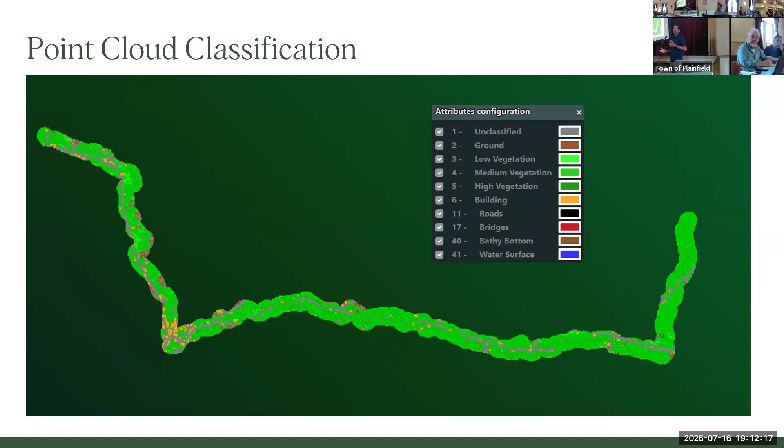Next slide. And then this is kind of the heart of it. I just wanted to zoom way out. We're going to start out and zoom in, and this is a point cloud. And if you look at the classification, the different colors, each one means something different. So this information can penetrate through different layers. So one of the neatest things, go to the next slide.

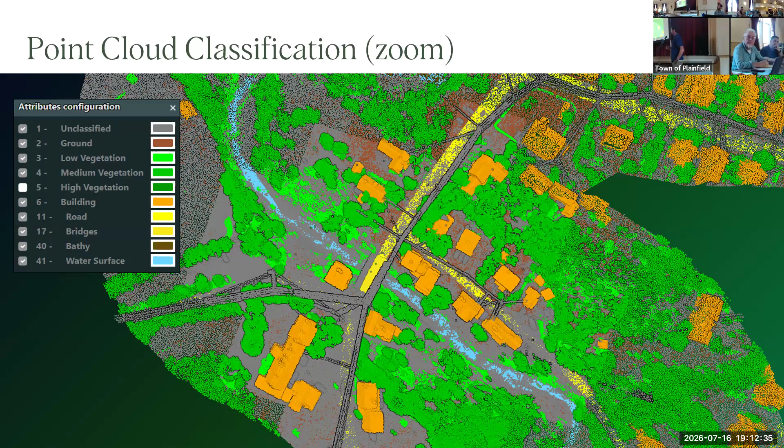So here's a zoom in of that point cloud, and you can start to really resolve every building. You can even make out some of the utility wires that are hanging, because this thing has such a high point density. And you go to the next slide. And one of my favorite features is from the top left, top right, bottom left, you can just turn off the layers and really look at any specific layer you want.

So if you wanted to do a high vegetation survey, you would now have that across the Great Brook corridor. And if you wanted to look in the right at just the topography on the land as well as the river channel, because this green LiDAR sees through water, you can do everything. You see the roads in between, the water surface is light blue, the buildings are orange. So it's a really valuable, powerful data set that's really ideal for hydraulic modeling.

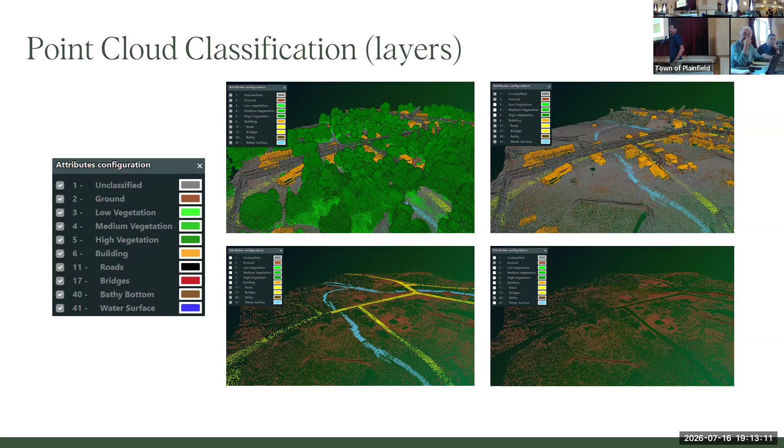Let's see, slide. And then here's a cross section. So in the model work, let's start on the bottom two. The bottom left is a 2023 state LiDAR. It's got a pretty good accuracy, about a 1 foot accuracy. And again, on the right, we're less than a foot vertical, about a 1 foot horizontal.

And this is just an example to show a little bit of increased detail on the right, but also you can really see the changes in the brook. These are the two same spots. This is one of the spots up near Brook Road where the river migrated into the roadbed, which is right here. Excuse me, Roy, is that what we call the Grand Canyon? I guess there's a couple of Grand Canyons out there, but I think this is the one that Carl and the road crew call the Grand Canyon. Okay. Yeah, so it's sitting on the road.

And then if you look in the upper right, a really astonishing view of how the brook has changed. Interestingly, the dark blue line is the 2023 LiDAR, and then the lighter, gray line is the 2026 that we just flew. The most obvious thing is you can see the whole roadbed's gone on the right side of this plot. But you can also see that the riverbed actually built up a little bit where the former river channel was, something we all see commonly out there.

The river goes up and down and moves side to side. A little bit of changes on the valley wall. That could just be a little bit of an accuracy thing. You can see the shape is translated over.

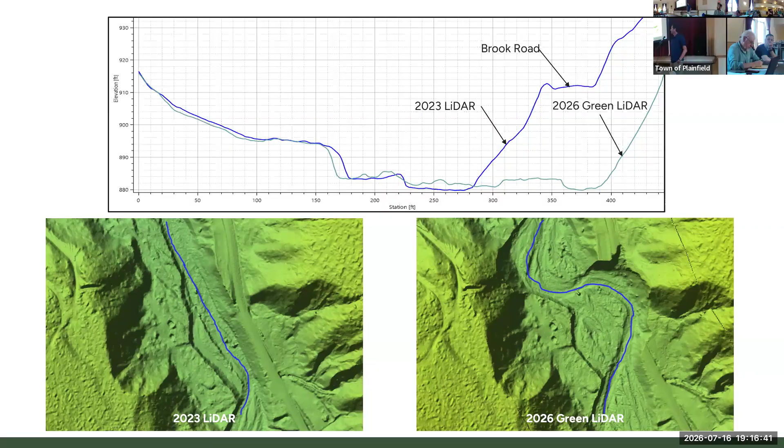Hi, everybody. So I'm going to walk through what we've been doing so far. We've been working on this for several months, trying to prepare for when we got the LiDAR. Now that we have it, we've added that into our model, and we're now using that. We were waiting to finalize the modeling and get the real detail in there until we had that accurate data, so we're actually representing what exists now. So we've been holding off for a little while, but also making progress, getting ready for that data. But now we have it.

So what have we been up to? We've been taking our model and updating what we call the geometry, the data that goes into the model to do all the calculations. We've been estimating flows and looking at how those compare to measured flows. We have some data from various folks in the community. UVM did some flow measurements at certain spots along the brook, and we compare what we calculate to what they did to see if we're matching reality. That way we know we're at a good starting point before we start changing things.

That's what we call validation for our model. The one we're going to be talking about is called the rain on grid, and I'll explain what that is in just a minute. But the idea is it's rain falling down on our model, and we calculate the flows from that.

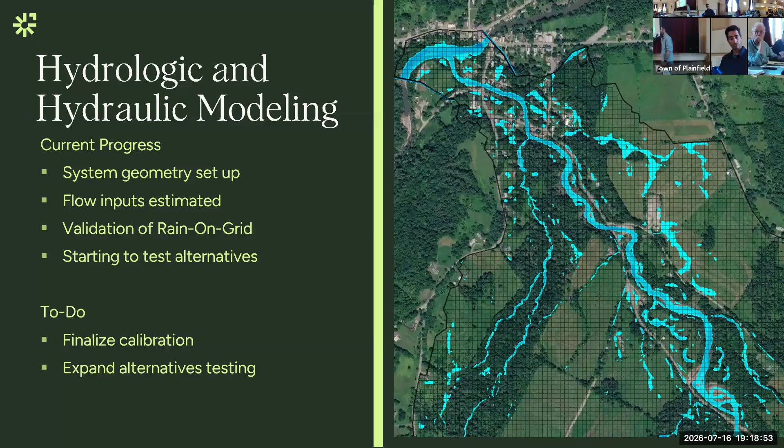All right, so you're going to hit the video. You should be able to just click and it should go.

Nice. So if you watch what's happening here, this is a terrain surface, and you're watching as the water builds up on it, and you're watching that flood move through. And the way we evaluate that in graph form is this hydrograph. It's flow of the brook over time. And what you saw was the water as the rainfall builds up; as the storm moves through, the flow builds up, and then it moves through that area.

So in the video, you're watching all the water from all around come into the brook and kind of increase until it gets to that peak and then drop back down again. So here's that peak, and then it's starting to decrease again. So this is our rain on grid model.

What it is, it's a digital mesh in our computer, just a bunch of grid squares. We tell it how much rain falls over what time period. We tell it what the ground looks like, what the soils look like, what the slopes look like. We give it that terrain, that LiDAR that we had. And then we let it figure out where the water goes and how much water it produces, pretty much.

So we're telling it, okay, this soil is really tight, it's not letting much water infiltrate, more of that's gonna flow off. And we're gonna see that in that model. And each of those little grid cells calculates separately how much water is produced from the rainfall, and then transports it down through the model, and then eventually you see it moving through the brook right there. So this is just a little video clip of what the results are from all of that data input going into the model.

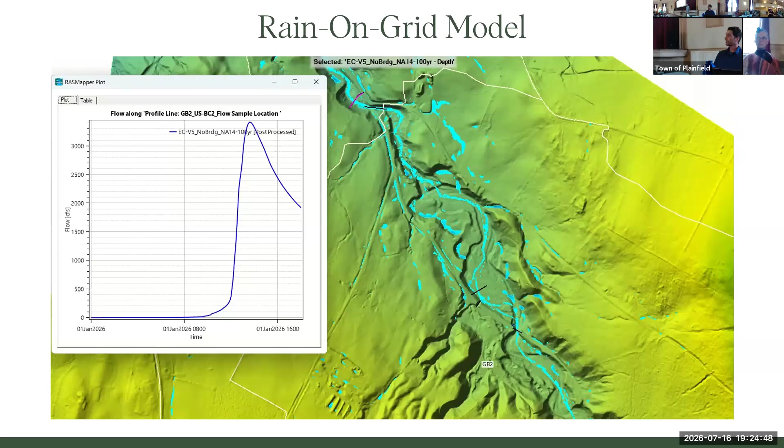And then what it produces, right, I was telling you, it takes that rainfall data, turns it into flow, and then we can go into the model and look at what that is. So this is in their hydrograph, right, flow over time, and it's showing the peak on Great Brook where it meets the Winooski River of about 3,500 CFS, which is matching up with what the flow estimates were by UVM, and I'll talk about that a little more in a sec. But we're pretty much taking rainfall data, and we're turning it into a flow curve, and we're looking at how that moves across the land with the model.

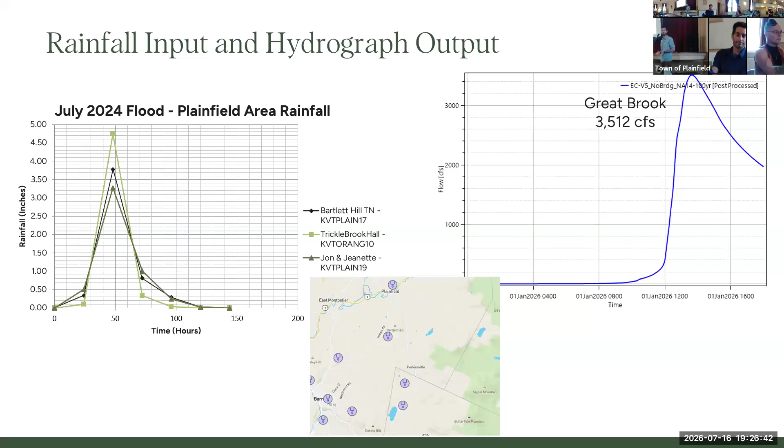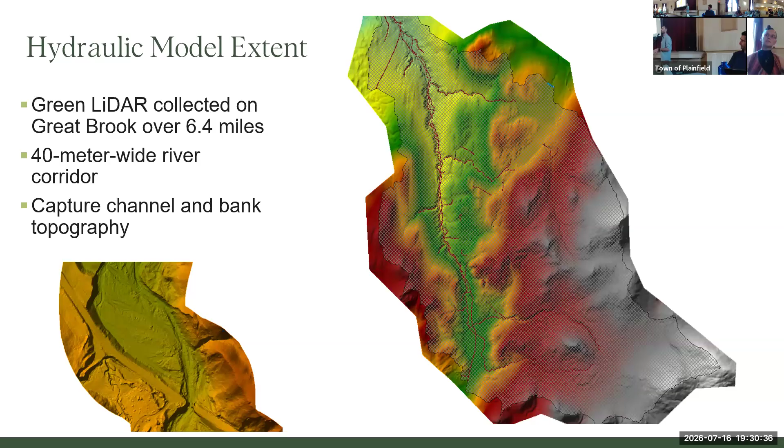Other input data we have are grid cells. So this is what I was just talking about with the grid cells. You can see there's little squares and there's other little shapes in there. Our average cell size is about 50 feet by 50 feet. That's over kind of the full watershed. And then in the more detailed areas, we get down to maybe 5 or 10 feet. So a little 5 or 10 foot square in the channel, along bridges, along structures.

We then tell the model where the channel is by putting in these lines. We tell it where berms are and ridges and embankments, and all of that is added in to tell the model what the ground looks like and show it where the cells should be. So this is quite a bit of work kind of manually going through and telling the model what it should be focusing on.

May I interrupt briefly and just say, I believe we're looking at where Cameron Road meets Brook Road. Is that correct? Yes. Whenever you can position a slide like this, I think it would be helpful for everybody in terms of saying where we are. Yeah, good point, thank you. Cameron Road's coming down and kind of meeting up with Brook Road right there at the bridge that we're calling GB-03.

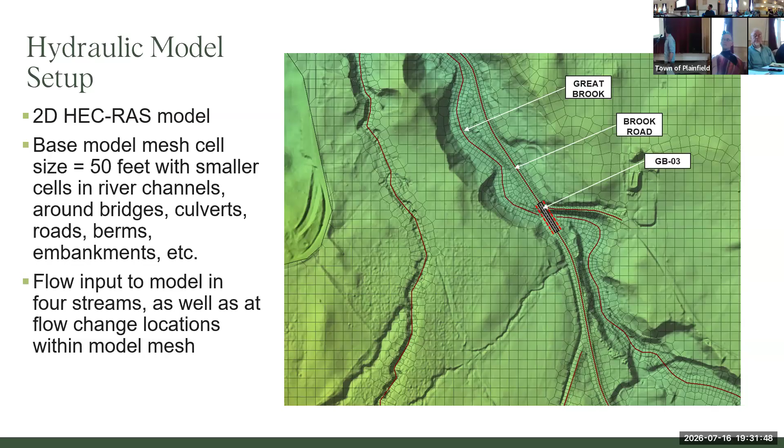Another kind of comparison, we looked at one of these earlier, of the green LiDAR versus the 2023 state LiDAR. And you can just see how different the channel is, right? You can see a lot more meandering, you can see it cutting through the road, through Brook Road. And so when we're modeling, we want to represent reality, and right now reality is this 2025 green LiDAR. So we've added that in, and now that's included in the model.

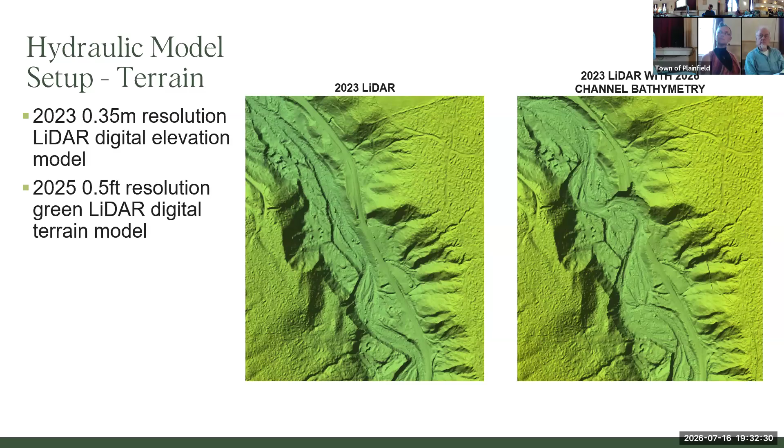Nothing at Brook Road, right? Good point. Yes, that should be just north of Brook Road, I think. Pretty close to Cameron.

I was mentioning land cover and soils. So those are our two big inputs for calculating that runoff and the flow. Here is a map of land cover. So this was done in 2022. UVM did a flight, and they had the data they collected. They're able to say whether there's tree cover, whether there's grass, whether there's farmland, whether there's houses. It's pretty high resolution. You can get individual building lines from this.

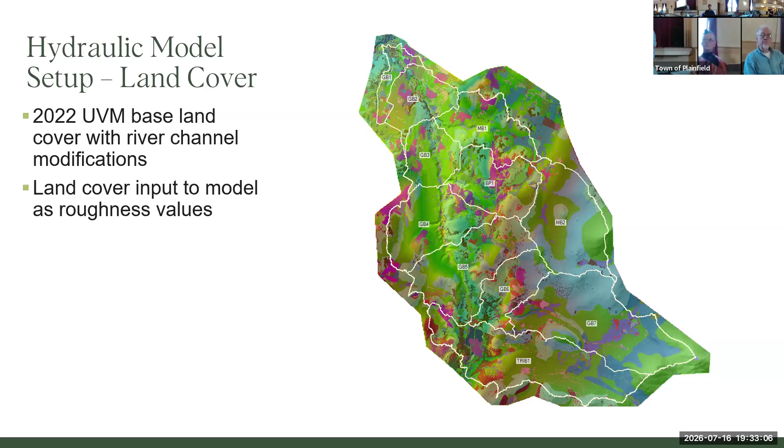So this data is all into the model, and I kind of just put it in this picture under the watershed. So you can see these little areas defining our watershed into little sub-basins. One of the last things we've added, so we got a bunch of data from Fitzgerald Environmental Associates this winter. They went out and did some survey of all the bridges.

So you can see here, this is what it looks like in the model when we enter in the bridge data. So we go in, we'll have some survey data of the bridge. We enter that into the model, and you can see this is what kind of the bridge opening looks like if you're facing, I guess, downstream from the bridge. So we enter that all in so that the model knows the shape, the opening size, the slope, all of those sort of factors, and so we can really have detail at the bridges.

All right, so kind of transitioning here, we've entered all of our data into the model, we're running the model, and now we're going to start looking at alternatives. That's kind of the next step that we're just diving into now. And how do we do that? How do we start to come up with ideas of what can we change? Where can we make modifications? Where can we do projects to help?

Some of the things we look at are, where are there constrictions? Where is the river being constrained, or is it being manipulated in a way that it doesn't like, and it's going to fight back on us. One thing we look at is the bridges. We look at the floodplain areas. We look at constrictions, so where the channel is narrowed or it's been shifted or straightened. And then we see how the model reacts in those areas.

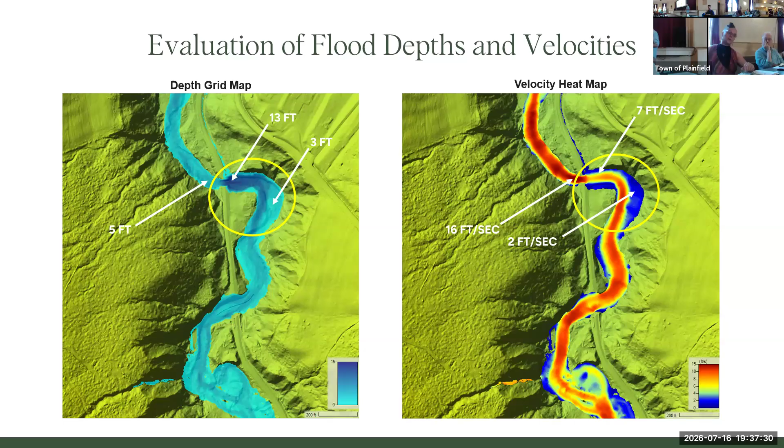So these are kind of the first steps we're taking right now. We're taking our results and saying what's happening here and what is that telling us. And I think this kind of shows that pretty well. All right, so now we're going to go through some of our initial alternatives that we're starting to evaluate. We're just in the start here, so a lot of this stuff is still just, we're playing around with the model, we're trying ideas. None of it's like projects that are about to be constructed. This is all just kind of ideas, and let's start thinking about what we can do.

One of those things is floodplain restoration, right? So that's digging up some of the floodplain, lowering it so the water can get out in areas where we want it to get out, and then it slows it down, and it also reduces the flood depths so that it's not affecting homes and businesses and properties in the road itself. Right now we have in those green squares some areas we've identified as potential, just something we want to try in the model. Even if it's not going to happen, at least we can figure out how that affects things.

So moving down through downtown, you can see there's Mill Street, there's the bridge there on the lower left, and then we have Brook Road going up to the right corner, just to get your bearings. And yeah, we have a bunch of different areas where we're saying, okay, if we lower that, does that help the rest of downtown? Moving a little farther up, we have some spots where the river meanders, and we've said, okay, can we cut that area down to slow the water down again and reduce it before it hits the areas where it gets a little tighter. So this is just a bunch of different spots where we're calling out some spot where we can test things.

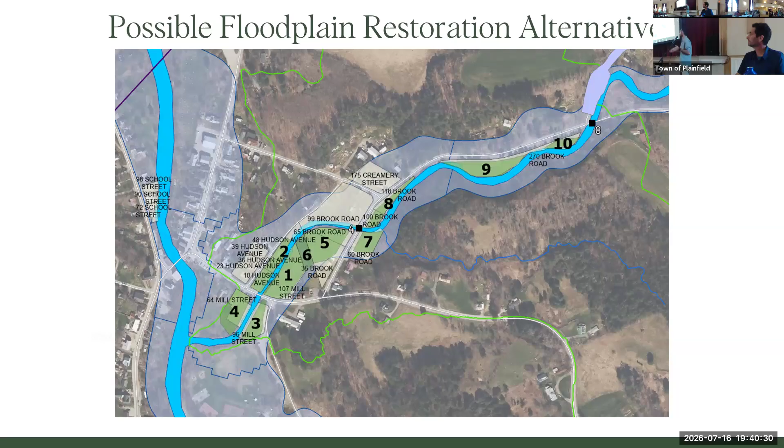All right, so we are saying alternatives, we have the floodplain restoration. Another option is the bridges. We know we had a lot of bridges wash out from this last flood. And when we went through and had all of the bridges measured, we looked at how they compare to the width of the channel. And in a lot of places, it's much narrower.

So we started to rank the bridges, evaluating each one to see which should be replaced and which are likely to fail. Usually it's the narrower bridges, the ones that are matching the channel the least, that are most likely to fail, generally. It also depends on structural things and whatnot. But those are the first places to look: what can we do to help with the flooding, the erosion and the bridge failure? Widen the bridges.

So we're calling out with our number system here. You can see each one of these is numbered. We're starting to call out which ones are the most undersized and which ones we should really focus on. Each of these numbered bridges is 75% or less the size of the channel. Many of the bridges are less than half the channel size. So you really don't have a shot at a long-term solution there, and there's going to be a lot of erosion around there.

And just so you know, the VTrans state standard for the width of the bridge is 1 times the bankfull width of the channel. There are other bridges that are not shown, and a few of them are over 1 times the bankfull width. But these are all 0.75 or less. A figure you've heard a lot is that the Great Brook Bridge, which we are repairing over and over again, is 40%. That was from an older measurement Milone and MacBroom did back in 2012 or so. We've always known that we have undersized bridges.

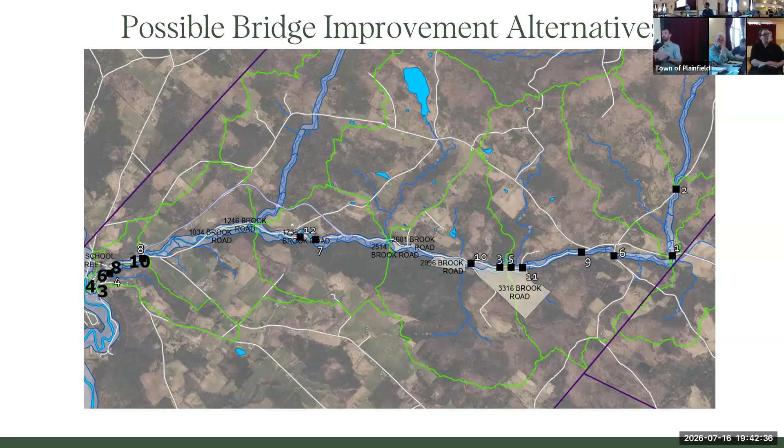And the data shows if you have a bridge that doesn't fit your channel and doesn't give a little room for debris, wood and sediment coming down through, you're likely to have failure. So making it as close to the channel width as possible, so that you can get all that stuff through, is beneficial. Oh, I already did it.

Another option, which VHB is looking at and we're collaborating with them on, is potentially realigning the road. Can we get the highest-risk portions of the road away from where they're at risk and divert the traffic, so we don't have to keep repairing them or replace all of those bridges? So this is one possible route, wrapping around to avoid some of the highest-risk areas. But we're still working on those with VHB.

Which one's the route? I probably should call that out. There's a purplish line that wraps up north of the river there. It wouldn't be north, it would be east of the river, but on the top of the screen. And there's also a yellowish tan that connects up to the road there. Is that east? There's 2 options. Cameron Hill Road to East Hill. I think that's Fowler. I think the small white line is Cameron. And another one is cutting up to East, because that's Muskasky Brook coming in the middle. Yes, so that is Fowler.

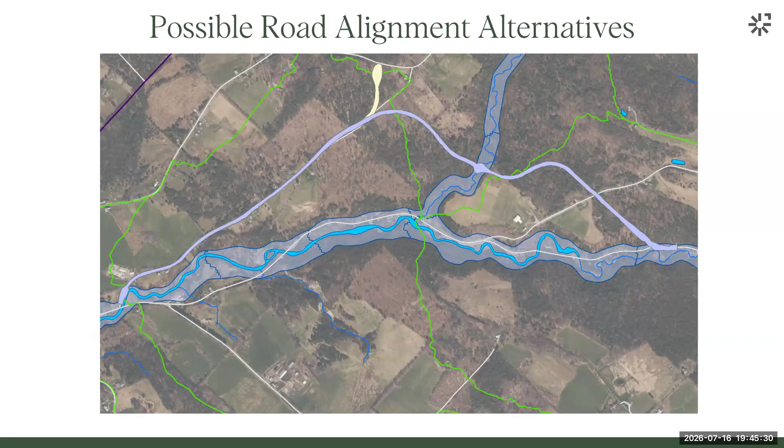For everything or just portions? For the work that VHB is doing. Okay.

I was just wondering, Ethan, if you could clarify which would be the realigned road? Would it be the highest line there? Yeah, the highest purple one. Well, those are just two alternatives they're looking at. The purple one that almost looks like a little bit of an M, and then the yellow that connects through, so they're thinking of two, as well as looking at repairing the road or trying to narrow the road. Those are, I think, the alternatives they're looking at, and we've met with them a few times.

One thing we're trying to do is, now that our model's about validated, is take the velocity maps and share that with them. And they now have the green LiDAR to use, to try to understand what the risks are from the river along the road. Because that's a big part of this decision, whether you move the road or not, is how the river behaves along the road. There are some spots where the road and river can coexist. A lot of the spots we've been showing you, there's a big narrow spot in the valley and there's no space for the full-size road there.

Would that new road run through the proposed community of buildings that you want to build off of East Hill? No. Okay, I wasn't sure. It's off the map to the left. Looks like it brings people towards it, but not through it. The idea of that new road would be you can see it crossing Fowler, which is the white line on the right of the blue path of the stream, and it will come back down to Brook just before Gray.

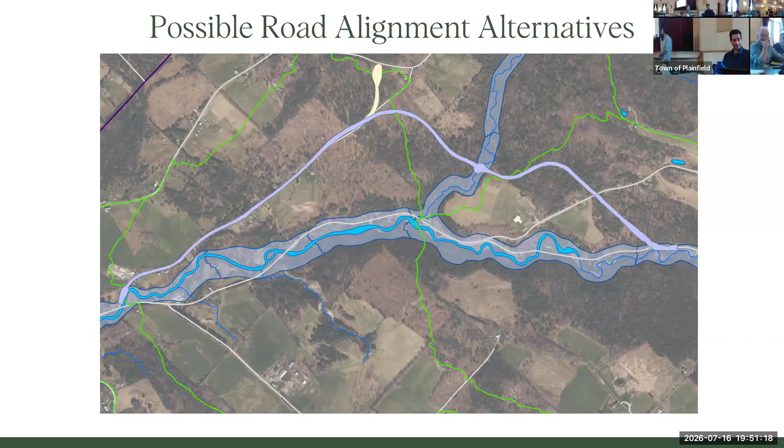All right, you're good. We have one last category of alternatives that we're going to look at before we wrap things up and just show you some initial results that we're working with. So one potential option, instead of moving the road, is can we modify the road? Can we squeeze it down to one lane in some spots? Can we shift it over slightly in some spots? And then to help with that, can we cut a little floodplain on one side and then shift the road a little bit on the other side?

So one idea is in that stretch where the road is just so close to the brook and there's really no room in the valley for the river to move, can we shave the meander bend a little bit? Can we bring that ground down a little to get some floodplain? And then can we take that road and just squeeze it over just a little bit, maybe make it one lane, and that's giving it another 10 feet, right? Maybe we have to armor the embankment of the road a little more, but does that really give us enough space to let the river do its thing and not carve its way back into the road again?

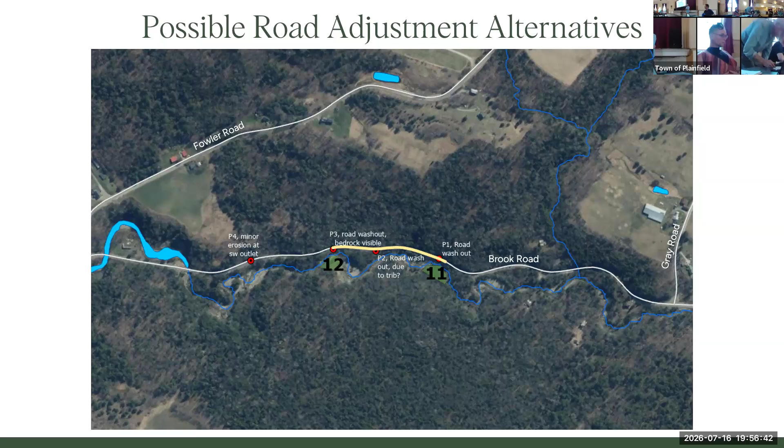I was taking this, Carl. Carl, did you still want to speak? What's that? No, I'm set. No, you got it. Yeah, okay.

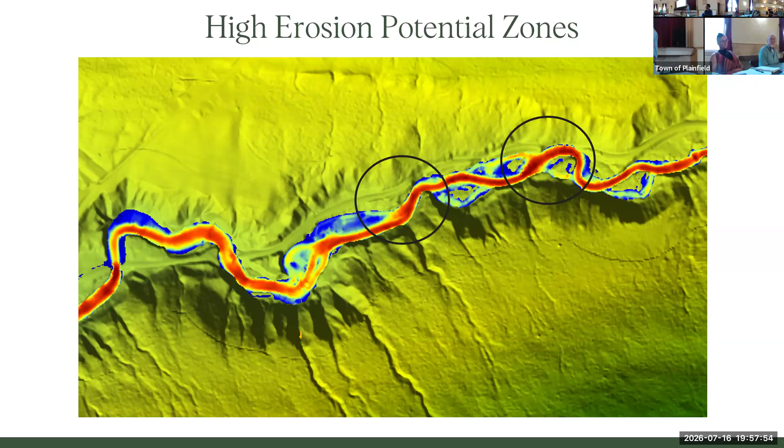Can we shave a little bit of that floodplain on the inside of that meander to slow that water down and reduce that color so that it's not such high velocities right along the road and so likely to carve into it? And again, we're kind of looking at the model in various spots. Where are these high energy areas? Where are these danger zones, these risk areas where there's a good probability you're going to get erosion because the water is moving so quickly and so erosively? So this is that stretch along the road where we're saying, can we give it a little more room? Can we reduce that erosion risk in some way?

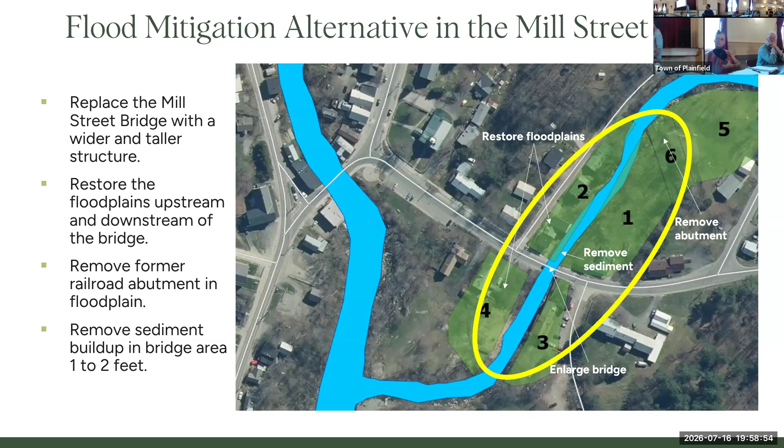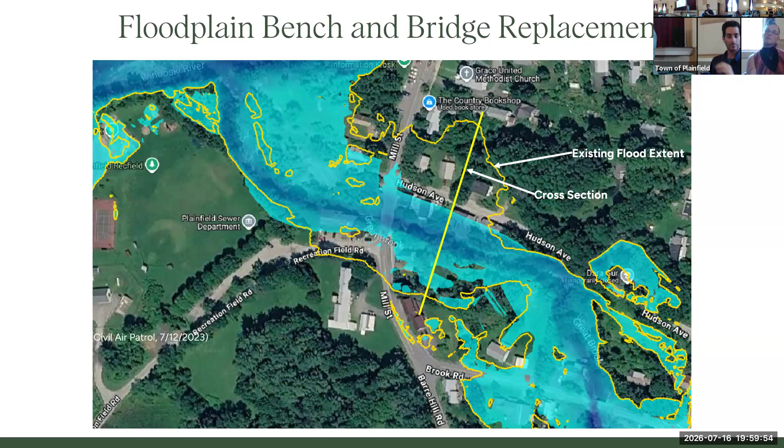And there's a yellow line that I've called out as cross-section. So on the next slide, you see what that looks like if you're taking a slice and looking downstream. There it is. You can see there's a green line. That is post-floodplain excavation. And there's a little bit of a brown line showing the floodplain before we dig it down. And this is looking again downstream.

There's a blue line. That lower blue line is after you put in the bridge and the floodplain, and the upper blue line is existing conditions. So you're seeing about 2 feet of drop in the water level, and you're pulling it all the way back to where we have the floodplain in the channel. So all of that area, something like 150 feet, you're pulling that water back to the channel, back to the floodplain where you want the water to be. So this is just one example and some initial results that show what a floodplain could do in the downtown.

Question, is this 100-year flood or 500-year, the top blue line? This is the 100, but it's pretty much what we saw in July 2024. Which is more than 100 or is a 100, in the sense of the typical scale? So it's a complex question in that it's somewhere between them. Depending on how you look at the statistics and what data you're looking at, it's a 100 to 500 year flood. Our model results match up to that flood. So this is like taking that 2024 flood, putting it in the model and saying, what can we do? So it's that same flow as what we measured.

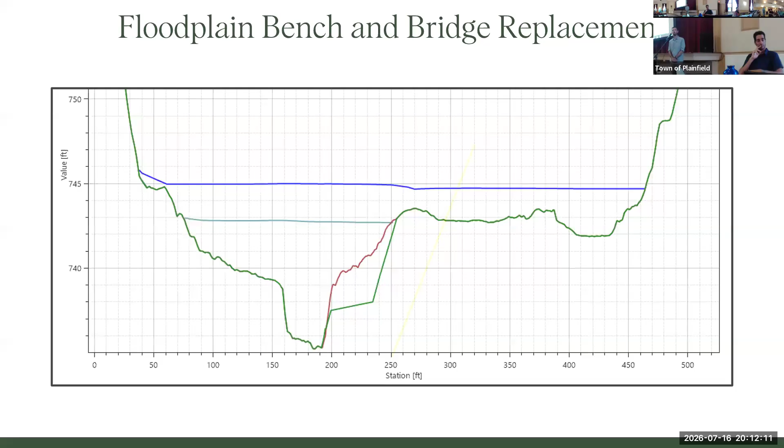Yeah, so I have a question about flood mitigation. You listed a few different possibilities. Lowering the floodplain in certain places and that kind of thing. And you mentioned removing sediment as well. And I'm just wondering about that idea, because would that not cause the stream to cut down and create higher banks, which would then collapse? Yeah. I guess it's a matter of balancing benefits and risks.

Whoops, I should be talking here.

So I'm just wondering about that idea and what you could tell us about that. So if we're removing sediment, we're not talking about dredging the stream. We're not talking about just digging it down. We're talking about doing it in a way that we're trying to match what the stream wants to be. So in some spots where we have those bridge constrictions, you're seeing sediment build up in them or upstream of them, right? It's slowed down the flow, the sediment drops out, and now we have the bridges partially full, or the channel upstream is full.

If we widen that bridge, what we might do as well is dig some of that out, but shape the channel in a natural shape. We're not going to be just digging down, we're going to be digging in a channel and then also building a floodplain. Right, so it's doing it in a smart way. It's not doing it in a way where you send a shovel up the stream that just digs out the channel and deepens it.

You want to make sure that the water, and we're going to model this again, looking at the velocities, you want to make sure you're not suddenly increasing them and adding to that erosion. So. Yeah, I just want to add to that, like that specific alternative was at Mill Street, where we've seen documented aggradation. Right. You would never do that up in the river, because the biggest issue with Great Brook is it's cut down too much. Right. That's what's initiated all the landsliding.

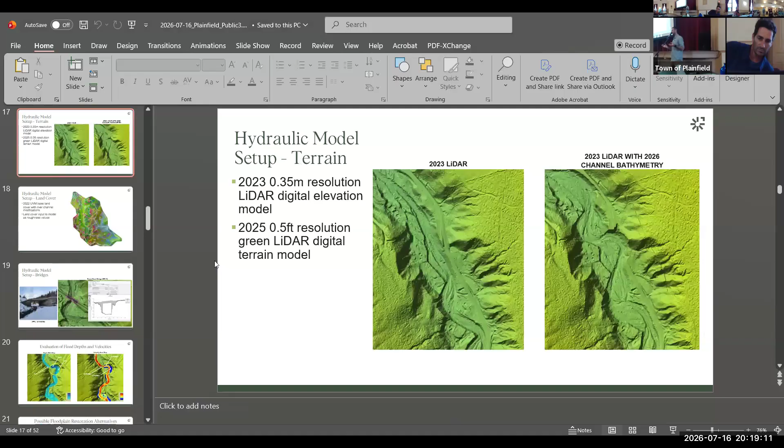So the first step was fill the bridge. And so we can do that. In our model, we can change the ground elevation, or we can change what we call the roughness in the bridge. We can change these factors and say what is happening. And this is kind of replicating if you threw wood in there, if you threw rocks in there, if that all gets jammed in. In this case, we tried to clog the bridges up a little bit, about 50%, just to see what happens. And then we started matching those lines better.

And so we'll probably be doing that for a lot of stuff. And when we try the new bridges, we're also going to do that. We're going to say, all right, well, this is now an 80-foot bridge. It's much closer to what it should be. But let's say it gets filled with sediment because the bank fails upstream. We have these crazy giant slope failures where suddenly the river cuts and you have the sediment come down, and you have the trees. And so that washes into your bridge.

Even if it's a good sized bridge, even if it should pass the flood, it's still going to be full of stuff. So we can try that. That's what we will try, is that we try alternatives. We're also probably going to fill things up a little bit to see how that happens. I'm trying to think of all other things.

I think part of his question was to remove or not to remove. Okay, yeah, a couple of things. When V-Trans came through to clean the wood out, we finally got activated on call for flood recovery through DEC. And we started walking around with them and saying, here's the wood you want to leave, because it's actually capturing sediment and the river's wide. And then here's the wood in front of the structures.

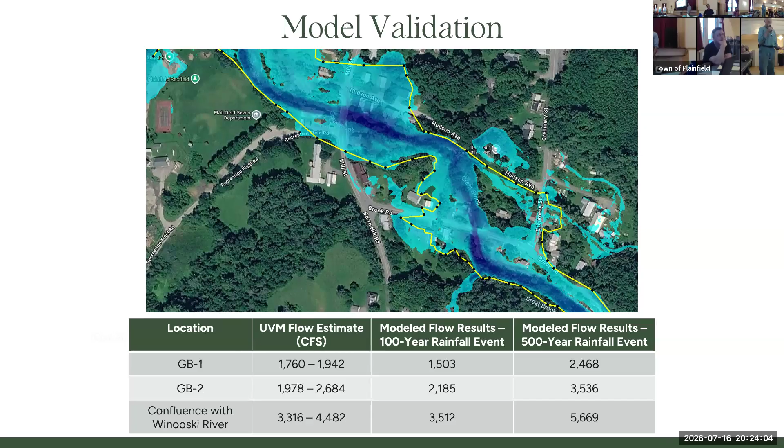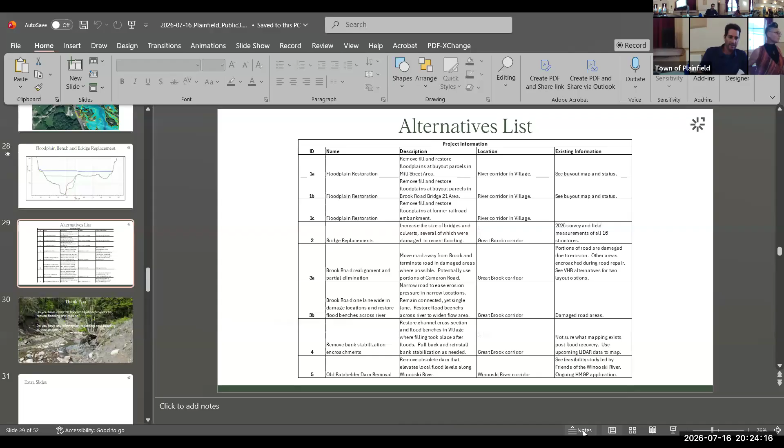You have more slides? Yeah, you want to keep going? We had one more. Sorry. We'll finish it up. It was really just, yeah. Go ahead, Ethan. All right.

It's pretty much just a summary of all the things we were talking about. These are our list of kind of broad alternative categories, right? You're seeing floodplains, you're seeing bridge replacements, realignment of Brook Road, stabilization, removal of stabilization measures that kind of stick out in the channel and push the water. So this is kind of summarizing that location, and then we're going to start looking into each of these as we go. So we're starting with the floodplains, we're starting with the bridges, and we're kind of working our way through, and then we're going to start to present more of those results.

Yeah, and just one last thing on that. We're getting here to the time where we need to make some decisions. Let me make sure this is on. So not only do we want to hear things, if we're hearing some good questions that we can come back and answer with the modeling, but also we owe the state a couple concept designs and some benefit cost analysis to see if the projects that are good for flood mitigation are cost effective. And the idea is that these will be packaged and ready for the town to submit for a hazard mitigation grant. But because we're scrunched a little because of our data collection lag, we're going to be moving a little bit quicker.

We'll come back one more time with a bunch of results, and then we need to make decisions to make some concept designs to prepare that last important deliverable for the project by November. So I just wanted to throw that out there that we kind of need some input from people on what we want to do. To me, it seems like the initial alternative, connecting with the designers of Mill Street and then taking advantage of whatever buyouts happen in the village, those should be floodplain restoration areas. Something needs to be done up at the Narrows where the Grand Canyon is, where the Brook Road fails, and then there's a couple more spots in the village we have our eyes on. So those are probably the top candidates right now in our minds, but we would like to hear from others if you have ideas.